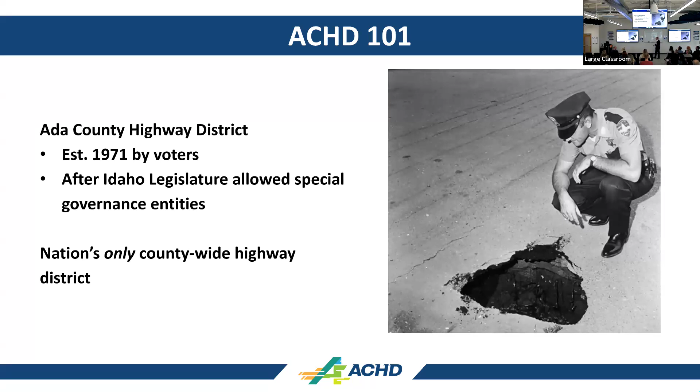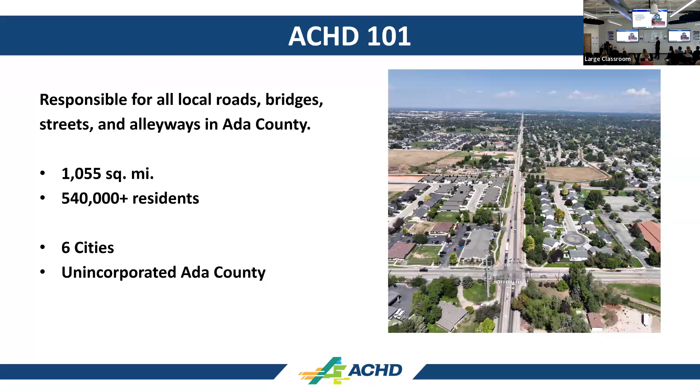In Ada County, we handle all the local roads, bridges, streets, alleys, and so on in the county. We have about 1,055 square miles, more than 500,000 residents, and 6 incorporated cities. Of course, we handle the unincorporated areas of the county as well. There's over $4 billion worth of assets that ACHD manages.

That includes 5,400 lane miles of road. That's enough lane miles to build a 2-lane road from here to Orlando, Florida. So that's the quantity of streets we have. We have 460 signalized intersections, 3,000 miles of sidewalks, and then all the facilities, the fleet, and the heavy equipment for maintaining all of that.

One thing that's interesting: the intersections, even on the state and federal highways in the county, we control and manage all the intersections, all the signal timing, and so on. So if you have concerns about signal timing at any intersection, ACHD is the place you can call.

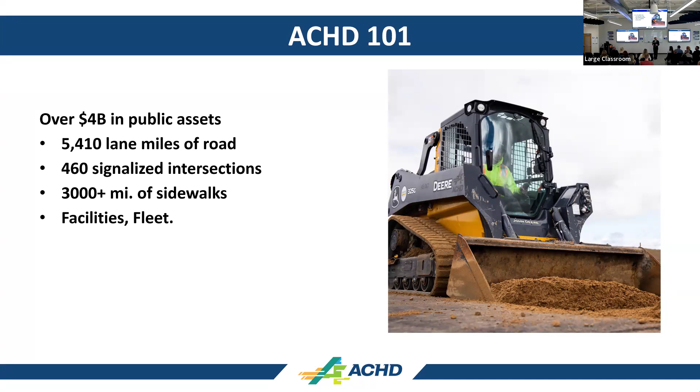Jim Hansen is stepping down this year. This is the end of his 3rd term on the commission, so his district is an open seat at this point, with 2 people running. Alexis Pickering is also up for re-election in District 2, and she does have an opponent there. I'm running for re-election this year as well. Those are the 3 districts up for re-election. I'm running unopposed, so thank you for your vote. I appreciate it very much.

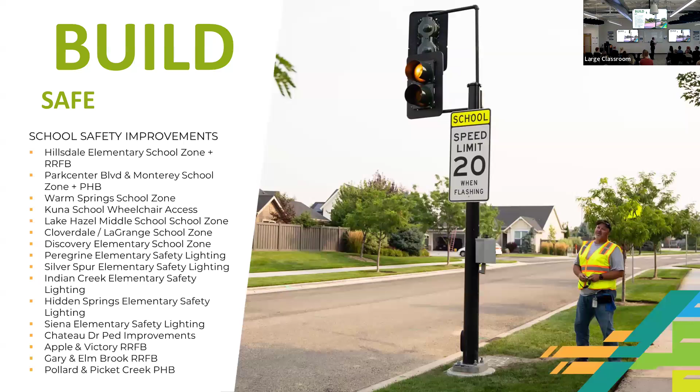Now let's talk about building more, because that's what I hope to do, is build more. Here are some major projects that are part of our integrated 5-year work plan. Several of these are in process right now, others are upcoming over the next year, and others over the next 5 years. We're right in the process of evaluating all these projects, and we welcome your input, the input of the general public, on these.

The decision hearing on our integrated 5-year work plan for 2025 is coming up on September 25th. That's an evening meeting at the ACHD headquarters, 6 p.m., and we would welcome as many as possible who want to attend. You can look online at all of these things in preparation to see what's on the plan and give us your input.

Here are just a few that I will mention specifically. State Street, 4th Street to 8th, is under construction right now. This was originally part of a larger plan, rebuilt from 4th to 14th. That project was put out to bid in 2022. Low bid came back about double what our engineer's estimate was and double what was in the budget. So we kind of choked on that number and said, okay, we've got to refigure things.

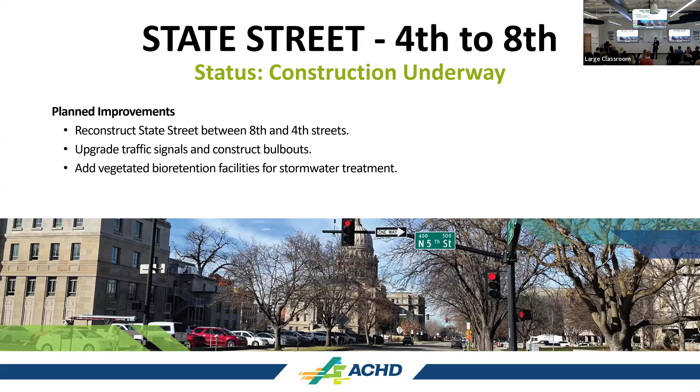The Eagle and Amity intersection, along with a 1 mile stretch of Eagle Road, are being rebuilt. This is a $19 million project - huge money because the amount of earthwork involved is huge. They're having to build some great big retaining walls because if you're familiar with that area, there are some big elevation changes in the roadways. So to manage that, it's being rebuilt and it's a big project.

But here's an interesting thing about this project. We put it out to bid a year ago. The low bid came back about 22 million, which again, we looked at that number and went, holy cow. But shortly after the bids were opened, one of the unsuccessful bidders lodged a protest that the winning bidder had not met the legal requirement that their bonding agency be licensed in the state of Idaho. And when that was reviewed by the legal people, they concluded yes, that's correct, their bid actually has to be thrown out. So it had to be thrown out.

A year later, here we bid it again. The price came back $3 million cheaper. So that actually was a good thing. There was a 1 year delay, not good. $3 million savings, good. So here we are, it's going forward, and that's going to be a project. It'll take about 2 years for this project to get done.

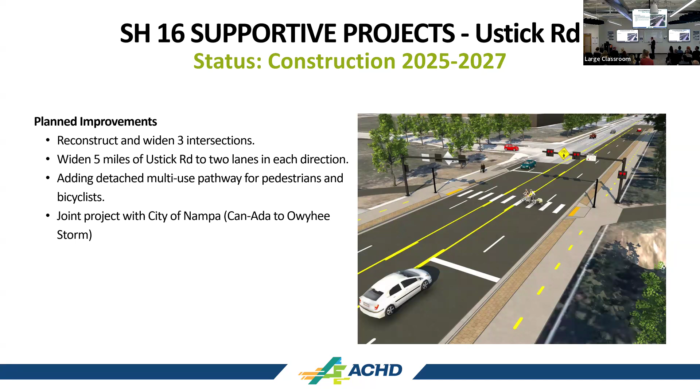New overpass, Linder Road going over the interstate. This is a big project. The city of Meridian has been very anxiously involved in getting this project and promoting it, and I'm absolutely on the bandwagon - this will be a great thing. It's in design right now, and we're expecting construction in 2026. The state ITD is going to pay for building the bridge, and we have to do everything else to connect from Franklin Road south to Overland Road.

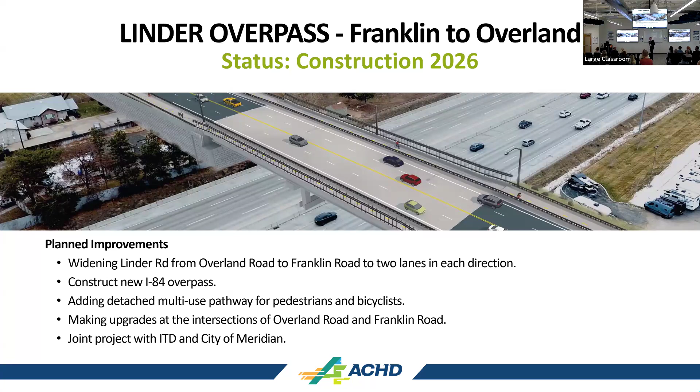But here's the great thing about this. If you look at the county from Eagle Road to Highway 16, there's not a single arterial that goes all the way from the North Bench all the way down to the south end of the county. Linder Road is the only one. And so once it's built, it'll go all the way from the North Bench all the way down to Kuna. And it's going to be a major thoroughfare simply because it has that long connection status.

5 Mile Overpass is a state project. This bridge was built in 1965, and the state identified it as needing replacement. But the road, 5 Mile Road, is a county road, so the state is doing the bridge and we're doing everything else connected with it. That project has been pushed back a bit in favor of the Linder overpass, because the state recognizes that a place where we don't have anything at all is a higher priority than a place where we have something, but it's not quite what we want. So we've got this older bridge, they're going to widen it and replace it, but it's been pushed down the list compared to Linder.

Question: has there ever been talk about an actual on-ramp at 5 Mile? No, because of the homes there. If you look at Google Maps aerial view of that 5 Mile Road area, you'll see it's very choked, fully developed. The cost would be astronomical to acquire all the land to build. Plus, on an interstate highway, that's a federal facility, so the feds would be involved, and you don't want interchanges any closer than 2 miles apart. 5 Mile is also very close to the Flying Y, which is a major interchange. So it's not going to happen.

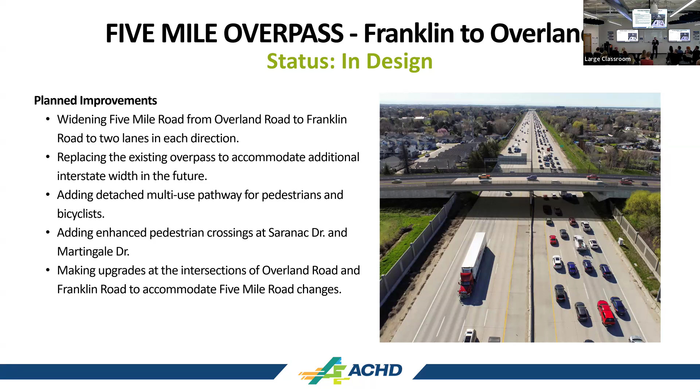That's the most common thing. But having a good appraisal is a good place to start, because all appraisals are not created equal. You know that. Did that help? Okay, so let's see.

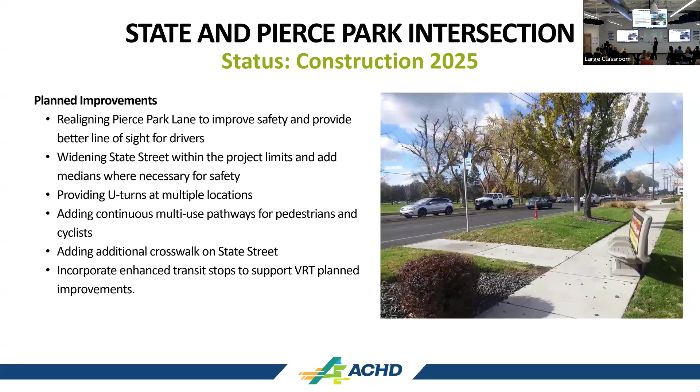State Street and Pierce Park intersection - this one is going to be constructed this year, fiscal year 25, which starts October 1st. This will improve the intersection and realign Pierce Park. All right, here we go.

Back to State Street, 14th. After the second bidding of this State Street project, and after the commission - unwisely in my view - pulled it back and said we're going to split it up, 8th to 14th, they came back with new concept proposals. We had a concept hearing back in July, and the concept approved by the majority of the commission was to take this section of State Street that has 2 travel lanes in each direction with a center turn lane in parts of it, so it's a 4 or 5 lane section.

They voted to change it to 1 lane in each direction, getting rid of half the capacity of the highway in favor of wide shared-use pathways for bicyclists and pedestrians. So they're taking a major arterial and cutting its vehicular capacity in half. No matter how much I screamed and shouted, they said, oh yeah, we're going to do this because being good to bicyclists and pedestrians just feels so good. It's virtue signaling. There are many places where this is appropriate - this is not one of them. That's my opinion.

But in any case, this is in design. If the makeup of the commission changes following this election - and I hope that it does, if the makeup of the commission changes in January - I will work to undo it. That's my promise to you and my promise to everyone. But at the moment my hands are tied, because 3 of the 5 commissioners voted for this.

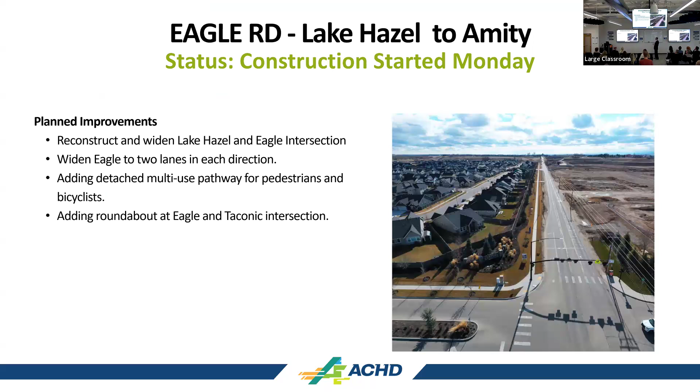Let me just say one thing about this State Street project to wrap this up. The original plan, if it had been executed, would have built the whole project for about $16 million, from 4th to 14th with its current cross section - current lane configuration and so on. But new stuff is needed because what's out there is old. With this new stuff and the new changes, in the end we'll be spending over $25 million for the same stretch of road, and as I said, we'll have half the capacity in that 4-block stretch, and cause delays that'll ripple upstream. So that's kind of the reality of the situation I'm dealing with.

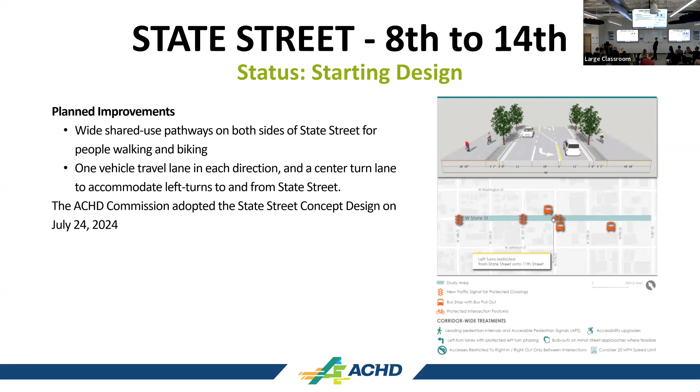The 5-year work plan hearing is on September 25th. Please get involved. And all this information you've asked about, you can get at our website.

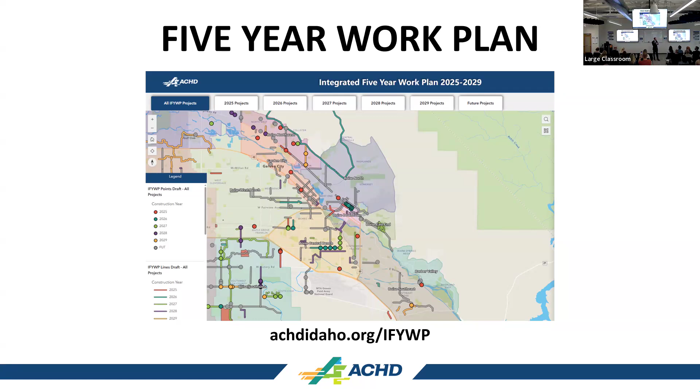If you go there, you can report issues, report potholes, look for road work, look for jobs, and look at different projects. For example, the 5-year work plan has an interactive map where you can see all the different projects and get information on each one - where it stands in the plan, what plan year it's set for, and what it involves, whether it's an intersection, a roadway, both, a bridge, or pedestrian and bicycle projects. You can also go to a portion of the ACHD website that shows current locations of road work. You can find out the status of the projects, the status updates - they're usually pretty close to up to date.

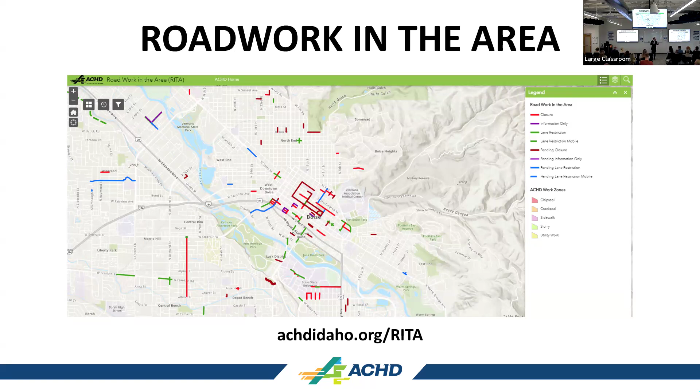Though of course there's often a lag, as you can imagine. Then there are pages for specific projects where you get even more detailed information - this is a screenshot from that page right now. You can click on any of those and find out the current status of those projects. And then there's the Tell Us page, which allows you to report something - a sign down, something damaged, any kind of roadway issue, flooding, potholes, you name it. You can type in your question, your issue, the location, and the staff is very good.

Something like 88% of the time, you're able to resolve these Tell Us questions within 24 hours. They're always very reactive, and we've gotten a lot of good feedback and good response on the Tell Us system.

And so there you are. There's all of our social media stuff, and there's a QR code. And now I'll be happy to take any additional questions.

Dave, can you walk through how the funding goes in line with the 5-year plan? So it's funded for 2 years, and then what happens after that? And also, what other entities are involved in making those decisions? So you have the cities have a vote on certain things, the public does, and kind of walk through that process as well.

Yeah, in establishing the 5-year plan, first of all, we look at all the projects that are needed, and we prioritize them, and then we send out a preliminary 5-year work plan, and we get input from all of the cities, from the county, from ACHD, and from the public. And so we take all that input in and consider it. It's not that they're voting, it's just they're saying, here's what we would like. And then as a commission, we consider that input and make adjustments.